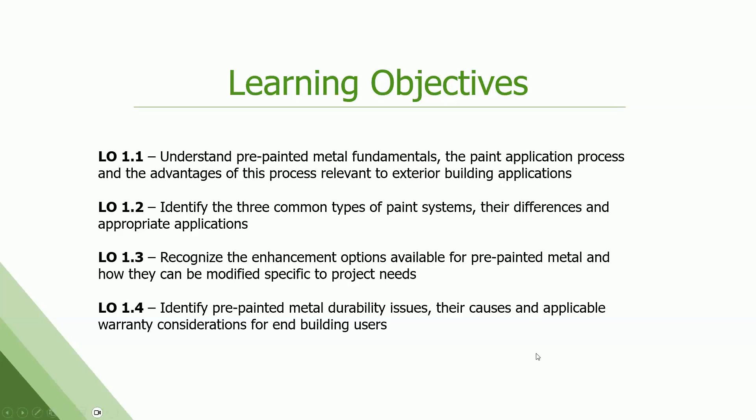So what is pre-painted metal? It's very self-explanatory. This is metal, usually coated steel or aluminum, which gets its paint applied in a factory setting before it gets fabricated into an end part for the construction industry. So these coatings have to withstand that forming, shaping, and installation process. There's a lot of science that goes into that, but they're not all the same.

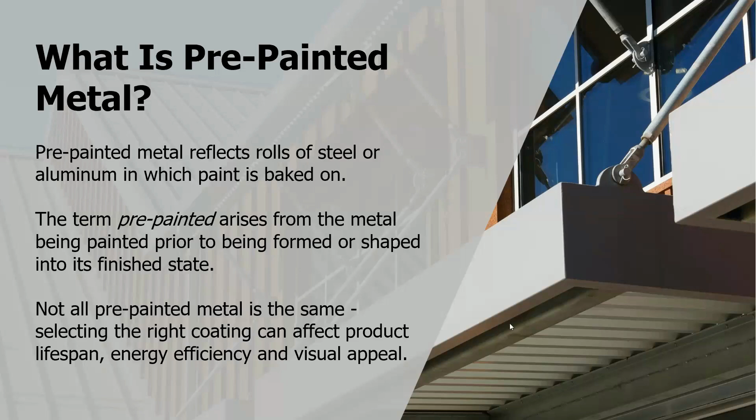So we're going to talk a little bit about how this factory applied coating works and a little bit about the substrate before we dive deeper into the paint coating itself.

Pre-painted metal or coil-coated metal goes into a lot of applications, mostly exterior, but does get used interior as well. Exterior building products tend to be metal roofing and siding, gutters, rainwater goods, insulated metal panels, composite panels, roof tiles, and trim and flashing accessories.

But we also do factory applied painted steel and aluminum for HVAC. Most of your appliances, kitchen type appliances, are coil coated as well before they're manufactured. Cabinetry, hot water heaters, door trims, ceiling trims, the T-bar that holds your acoustical ceiling in place—that's all coil coated or pre-painted metal.

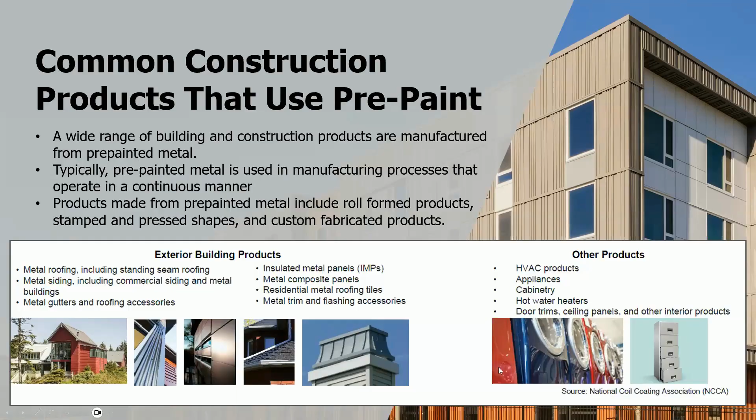Pre-painted metal fundamentals and how it is applied. Paint can be applied in 4 primary ways: air brush applied, dipping, rolling, or straight brushing. We use a rolling technique, but not like rolling house paint on, a little bit bigger than that.

This is a typical generic coil line or paint line. They tend to be very, very long. Our lines, for instance, can hold up to 2,500 linear feet of metal from end to end, so they're big, typically 3 to 8 stories tall.

We load the metal coil at one end. It's a continuous process, runs through the line, it gets cleaned, gets some pre-treatment, gets a primer, gets a top coat. Those are baked on at very high temperatures. These lines run anywhere from 100 to 700 feet per minute. From the time the paint is applied till fully cured and you're able to wrap that coil back up, it can be as little as 15 to 30 seconds. So very fast, very dynamic.

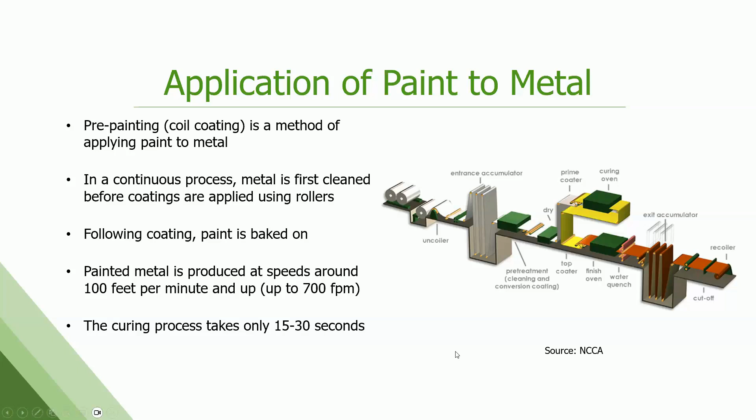This allows us to have a very good, consistent product as well. It's highly controlled. Everything is cleaned the same way every time. Everything's very automated. We apply the paint in a very controlled way each and every time. So if you order a specific paint today, you order that same paint a month from now, it's going to look exactly the same. You can intermix those coils.

Very efficient, we're not applying very much paint at all. It's very, very thin. A typical paint system is 1.4 mils, so 0.0014 inches in thickness. That is thinner than a piece of paper. By comparison, most other industrial metal coatings, like for cars, powder coatings are 2 to 5 mils in thickness, so we're using a lot less paint.

There are solvent-based paints, but we are capturing those solvents as they go through the ovens and using that heat in a closed-loop system, so the final product is VOC-free. And again, this all happens before the fabrication, roll forming or stamping, whatever's going to happen to this metal. So this paint has to be very thin, it has to be hard, but also very flexible, and it's got to last on the outside of a building for 20 to 50 years without any change.

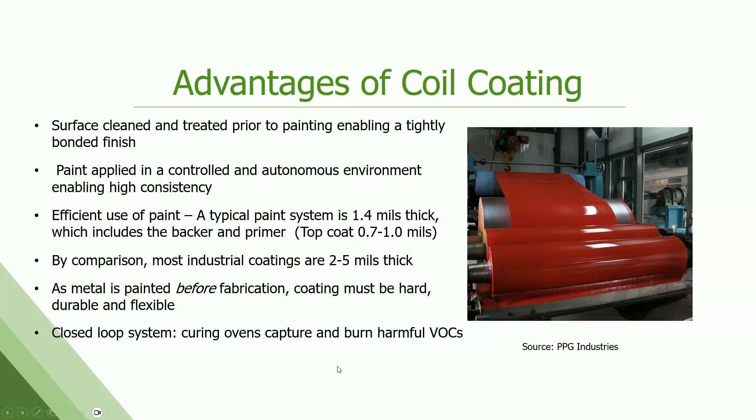But the size of how we do this and the fact that it's a continuous process does come with some limitations. Obviously there's a scale of economy here. It's very rapid once running. We can't start and stop very often, so we can't run very small jobs, or we don't like to anyways. So you've got to buy like a full coil.

We can do custom colors, but most coaters have a minimum order for custom colors or something special, typically whatever the line holds from end to end. So this can restrict the color palette a little bit, and can make it a bit more expensive or create much longer lead times if you need a short custom color run.

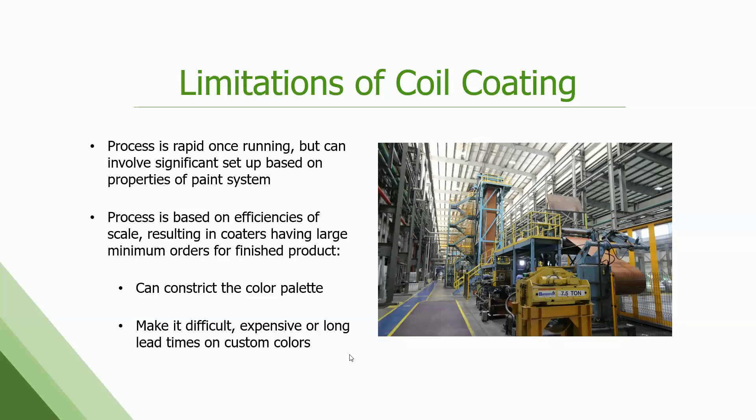So quality control, we do a lot of quality control. The paint companies do a lot of quality control in the paint before it even gets to us. And then once we apply it, cure it, bake it on, we do a lot more testing. The really important things are we've got to simulate that forming and fabrication process it's going to go through. So we bend it, we bump it, we deform it. We check to make sure that paint is sticking and there's no loss of paint.

Color is hugely important in this architectural space in the world, consistently. So we are applying film between 0.7 and 1.0 mils consistently, tight color control within usually a delta E, which is a measurement of color, of 1 unit or less, which is not anything the human eye can pick up on. It's all, for the most part, computer controlled for color as well, numerically controlled. Gloss, kind of how shiny that surface is, that's also tightly controlled and measured on every coil.

And of course, film thickness, very critical for long-term performance. If we're not at the right film thickness, it's not going to perform out on the building the way it should, and that impacts warranty. So we have several different methods for checking that film and making sure it's consistent across the width of the coil and from end to end in a coil and from coil to coil.

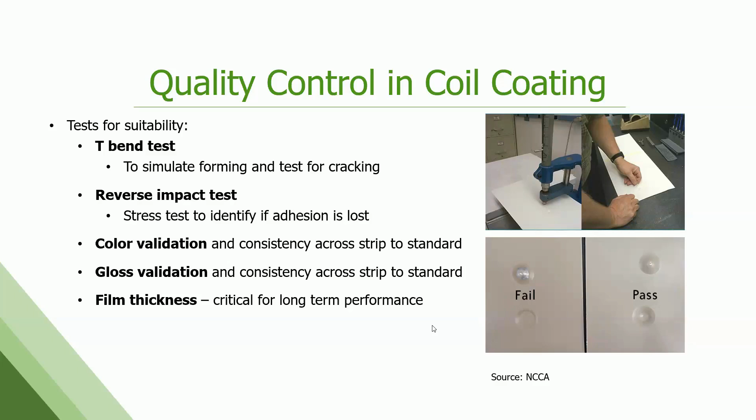But I want to talk a little bit before we get into paint about the substrate underneath, because it's very important as well, and there's whole other presentations that get in depth on it. But most coated steel is either galvanized, hot dip galvanized, or an aluminum zinc alloy, more commonly known as Galvalume or Zincalume, which are trade names for a 55% aluminum, 45% zinc product.

Hot dip galvanized is 100% zinc. It's been around a lot longer, but both are used for exterior buildings. The Galvalume product does come with a corrosion warranty. That aluminum component gives it much better corrosion protection long term. So you can get a corrosion warranty on that product for most applications, not all.

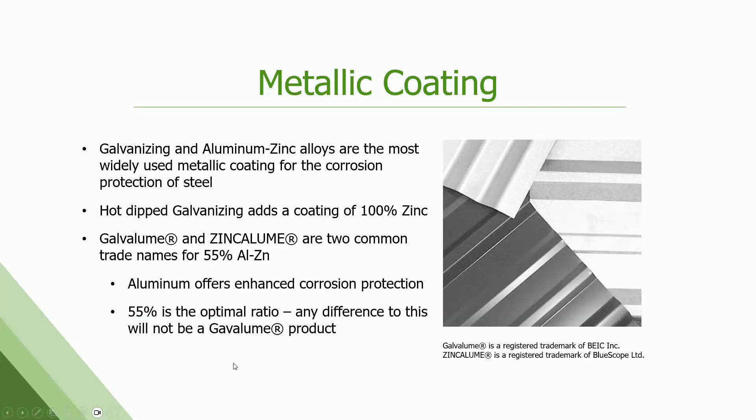If you're buying 55% aluminum zinc product, you probably want to make sure you go with someone who's BIEC licensed. That is a licensed technology. You can't use the Galvalume name unless you have a license. I actually need to change this corrosion warranty number - 20 to 25 used to be typical. We're now seeing 40 to 60-year corrosion warranties on this product out in the field. So yeah, make sure they're licensed. You can go to the Galvalume website to see who the licensed producers are here in the United States and globally. It is a worldwide product.

There are environmental considerations that will influence which type of substrate and coated steel you buy. Marine locations, heavy industrial, acidic conditions. I'm not going to get into too many of those details today, but it is something to keep in mind.

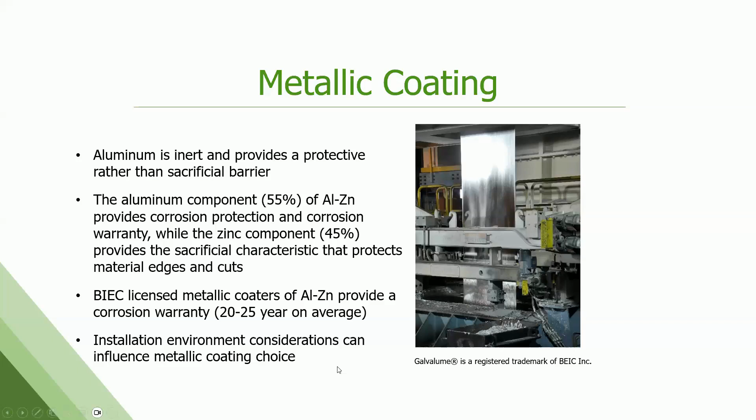So now we'll move on to paint. What is paint? We all know what paint is. We've all experienced paint in some form in our lives, whether it was finger painting as a child at school or painting our house or a car, or whatever that might be. It's a liquid, dries to a solid film.

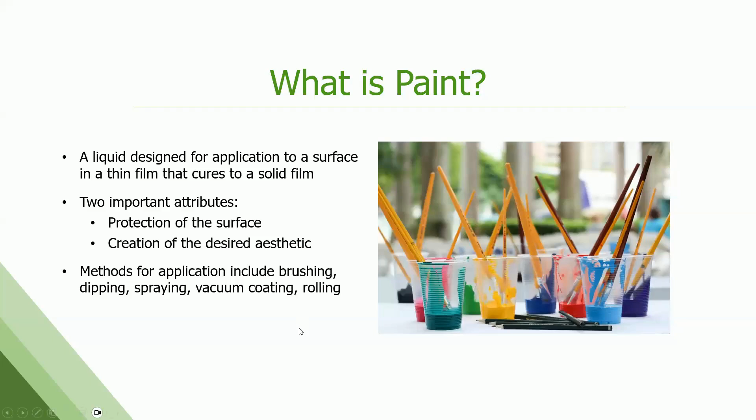Usually it's trying to do two things. It's going to protect the surface of whatever it's going on, and we want it to have a certain aesthetic and appearance. It can be brushed, dipped, sprayed, vacuum coated, rolling - there's a whole lot of ways to do this. In our world, for coil coating and for exterior roofing and wall, which is what we're focused on here today, the primary components are resins, pigments, solvents, and additives.

The resin, also called the polymer, or the binder of the paint, really dictates the physical and chemical properties of that paint system. It's kind of carrying the bulk of the load on its shoulders. We then have pigments, obviously very important for color and aesthetics, but also important for some protection and weatherability as well, which we'll talk about later.

Solvents - like I said, these are all solvent-based paints. They've got to be in a liquid consistency at a viscosity that we can pump it out of a drum onto a coater head on a paint line and apply it. You don't want it to be too thick, you don't want it to be too thin. And then there's additives, which just fine-tune the overall characteristics.

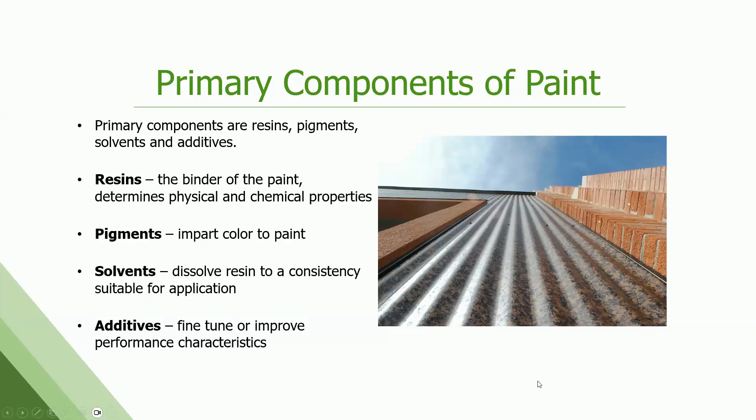So this is kind of a cheat sheet on the components of the paint and what they're bringing to the overall recipe or equation here. So the resin, the polymer: durability, hardness, flexibility, adhesion, gloss, chemical resistance, corrosion resistance, humidity resistance, impact resistance. That's a lot, it's a long list. Pigment, again, primarily aesthetics, but also hiding the substrate. Some corrosion resistance comes from the pigmentation in the primer as well. The strength of the film, some water resistance, of course, UV durability as well.

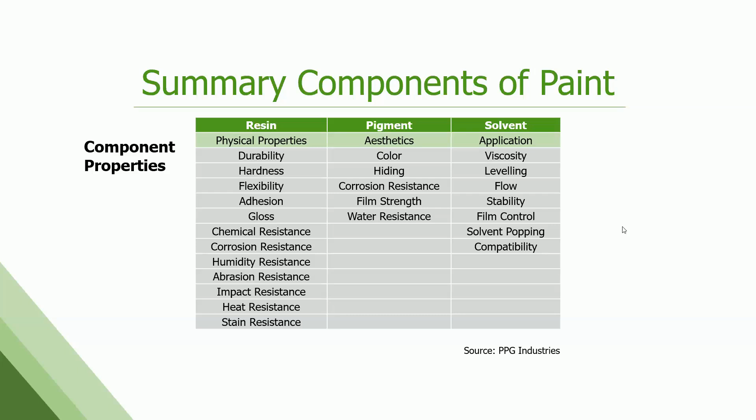And then the solvents, really not applicable to the end user, more important to the coater, but it's got to flow good, flow right, allows us to control the film. It's got to be stable, right? We want drums of paint that are going to last more than a couple months because we might run only part of a drum, put it back in stock, pull it out again later. So it's got to have the right solvent blend so that all that stays in mixture the way it should.

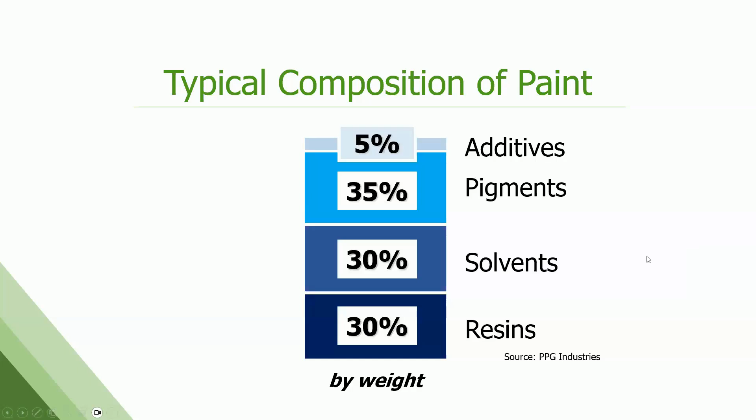So how do you pick the right paint? It's a million dollar question, right? You have to balance all of these properties with how it's going to be used at the end.

For roofing, roll-formed panels, it's got to be somewhat flexible and a bit hard, but not too hard and brittle. This red line here is kind of where our typical exterior paints fall. They do lean a little bit to the harder side rather than too soft.

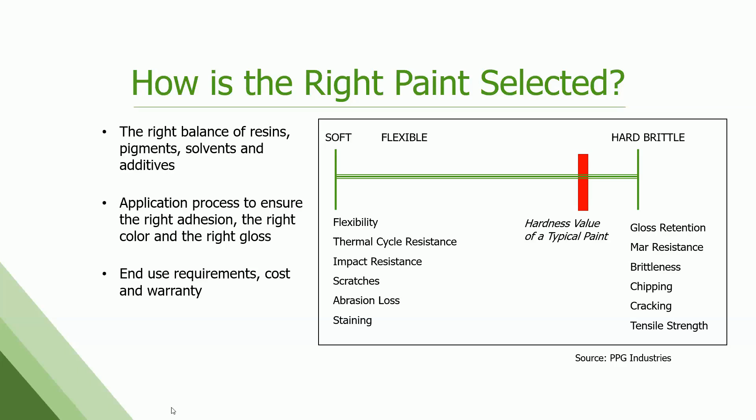So pigments—this is the fun part. This is how great it looks. These are insoluble particles, finely ground to a really small level and then dispersed within the resin or the polymer. That needs to happen evenly so you get a nice even color.

We use organic and inorganic pigments both. Inorganic pigments are metal oxides, usually things that are mined out of the ground. They're then fired at high temperature to make them very, very stable. They tend to be your earth tones—a little bit duller yellows, reds, greens, browns, and blacks.

Then you have your organic pigments. These are the bright primary colors—bright greens, bright reds, bright blues. They look great, but they're not very durable. We've probably all seen older red cars that have faded, or bright colors that have faded on signage somewhere in our world. They just don't hold up very well to UV light.

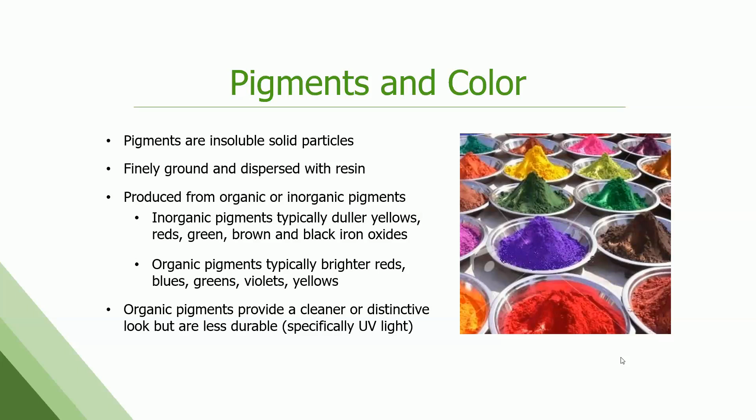So the paint companies spend a lot of time making sure these pigment ratios are good so we can achieve the color we want, but also perform long term because they're going to get a lot of constant sunlight. You may need a clear coat if you use a lot of organic pigment to help protect it more out in the field. And that's also factory applied.

Color—we talked about color. Very, very important, right? Consistency, how it looks to the eye, very important in the design world. So we do measure the LAB system, which is light, dark, yellow, blue, red, green, numerically for almost every color we run. We can't do it on the metallic micas, but we can do it on all the solid colors.

Most lines are running to a spec that's plus or minus 0.5 deviation on this LAB scale from the controlled standard, which is incredibly tight. The overall calculation is called delta E, of color change or color difference from a control to your sample. The human eye really doesn't start to pick up color change until you approach a delta E of 1, and we're controlling much lower than that from run to run.

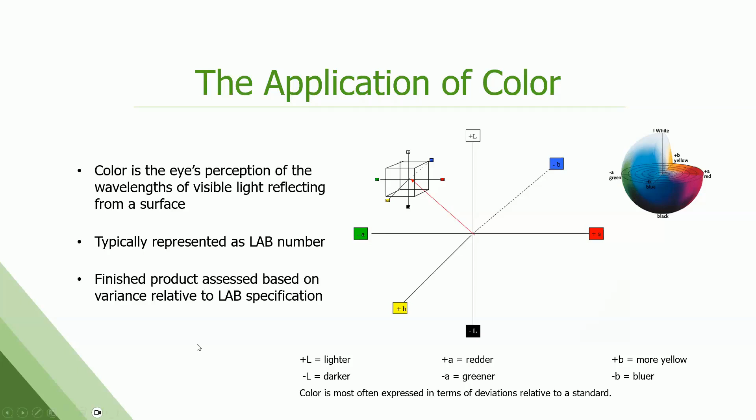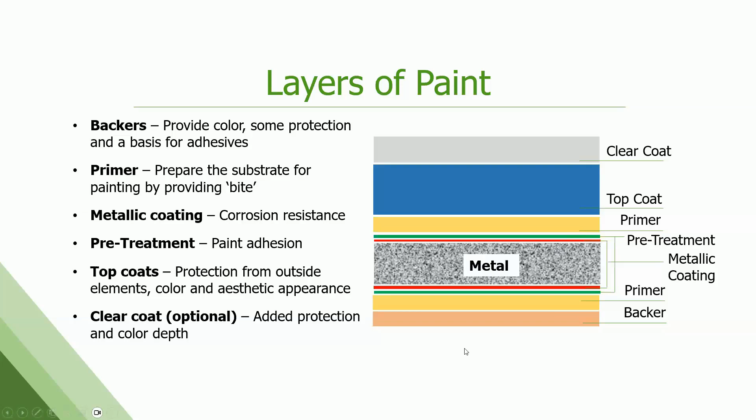Our first question: does the backer coat have the same life as the top coat? Typically, no. Standard or universal backers tend to be a lower end product and not applied at full film thickness. It will have a primer, but it tends to be done at a half coat, usually white, off-white, or light gray. It's probably more like a 10 to 20 year product, as opposed to a 40 or 50 year product on the top side. But if that backside is going to be exposed and you're concerned about its performance long term, have that conversation with your supply chain, because you can do a higher grade coating on that bottom side if needed.

How do you control batch to batch color consistency? Is color consistency better with an SMP or PVDF paint system? No difference on paint type as far as color consistency—it's done the same. I'll deflect a little bit: we rely heavily on the paint suppliers to do their job right. They've got very tight controls in their processing to make sure their batches come in the same to us every time, controlling to probably less than plus or minus 0.5 on the LAB scale. Most paint companies are using fully automated computerized dispense cells, so they can fine tune their pigmentation and final paint formula to us. For us as the coater, it's about repeatability of our process—duplicating roll settings and line speeds every time, hitting that film specification every time, and controlling that very tightly. We really don't see too many color issues off the line. It's quite consistent. I've been around a very long time, unfortunately—I'm on the older side now—but it's so much better than 25 years ago. We rarely have pull-offs because of color anymore.

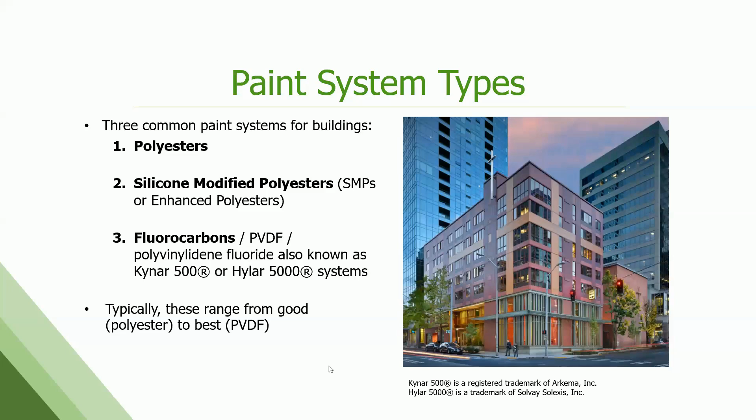Silicone modified polyesters are polyesters that have been enhanced. Fluorocarbon—I don't know why as an industry we have like six names for this product, but we do, I think because we like to confuse everyone. Fluorocarbons, PVDF, polyvinylidene fluoride, there's a little bit of chemistry for you—I won't ask you to repeat or spell it. It goes by the trade names Kynar 500 or Hylar 5000. You'll see in the architectural specs for monumental type projects, big buildings, big commercial jobs, government jobs, PVDF or Kynar/Hylar will be called out in the specs. The paint companies have to be licensed to claim their product is Kynar or Hylar—that's a licensed technology. These are listed in order here, typically from good to best, historically.

Polyesters, workhorse of the paint world. Huge amount of variation in formulation, huge amount of variation in warrantability and what it's going to do. I like to remind people the chemistry family of polyesters - a polyester denotes the type of chemical link that's occurring in the polymer. So we're doing polyester paints, and some of us are probably wearing polyester clothing, right? Very different products, same base chemistry.

A lot going on in the polyester world, but it's very cost effective. They have great flexibility, but can also have great hardness, so there's a wide range there that you can formulate to. Really wide range of color and gloss - you can get very high gloss out of polyesters, more so than you can in the PVDF.

Incredibly versatile. We see it mostly for lower end metal roofing. Polyesters are used extensively for rainwater goods, downspouts, light agricultural and commercial appliance wrappers. And then most of your interior products are going to be polyesters as well, because they don't need to have the exterior durability. But now I will also add a caveat here, that in the last 10 or 15 years, polyesters have come a really long way.

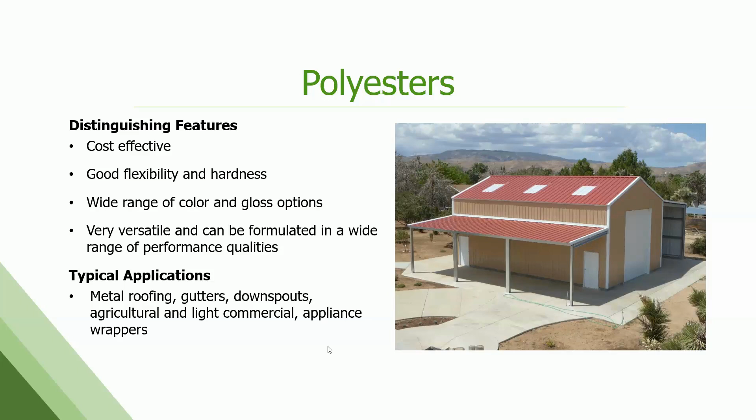You may hear terms like super polyesters, super durable polyesters. There's recent polyester technology that has really bumped up its performance in an exterior setting, really pushing the boundaries, and has gained a lot of ground on PVDF. So they're out there, they come with pretty good warranties, but you might hear those terms, super and durable polyester combined.

SMPs, again, silicone modified polyester. So if you react silicone into the backbone of a polyester polymer, it gives you better weatherability, better UV resistance, better resistance to chalk. You still get a wide range of colors and glosses. It is lower cost than the PVDF. We see SMPs used a lot for residential and light commercial, both roofs and sidewalls. Again, this technology over the last 20 years has really advanced as well.

If you're using really good inorganic pigmentation, both in the super polyesters and the SMPs, they're going to have outstanding long-term performance in the field, much better than they did, say, 20 or 25 years ago.

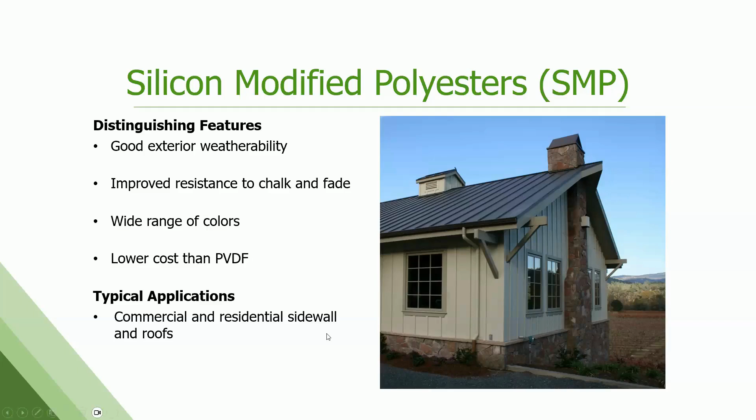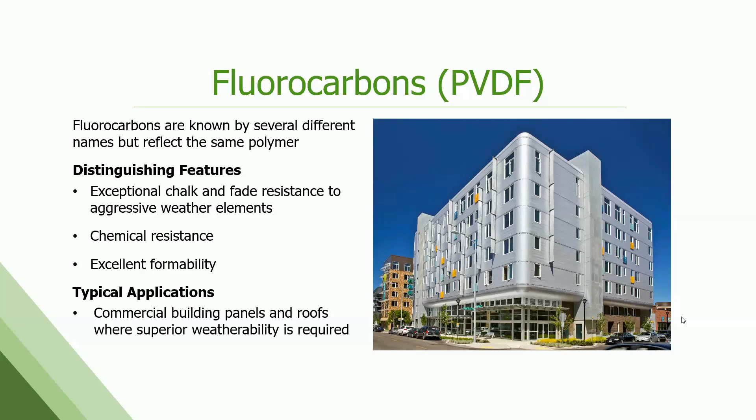So big commercial buildings, monumental stuff, stadiums, high rises, military jobs are going to call out fluorocarbon or PVDF. Also gets used a lot for high-end residential as well, so we do see it there. It's kind of the best of the best.

So again, a little cheat sheet for you guys, kind of a reminder of where these all sit. Again, polyesters are becoming tough because there's such a wide range - it's hard to just shove polyester into one bucket. But in general, good to better type system, very cost effective. Warranties can be anywhere from none to, I've seen some 25, 30-year warranties out there on polyesters. Durability, again, can range from limited to very good, very versatile. I do have the AAMA specifications listed here that govern each one of these.

SMP sitting in the middle - good workhorse, good for just about everything, wide range of colors, a little bit more cost effective than the next step up. And then PVDF is kind of the best. So high-end warranties, seeing warranties typically around 40 years for PVDF currently.

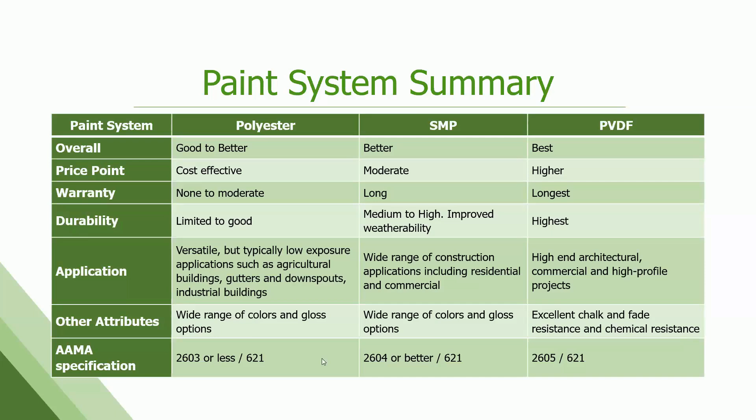So what do we want to consider when you're picking your paint, right? Because again, they're not all the same. And a polyester from one supplier may not be the same as a polyester from another supplier as well. So you've got to look at the technical data sheets, look at the warranty, to see what the performance is supposed to be like. So especially in polyesters, again, because of that wide range of formulations, they're not all the same.

The differential, however, from high-end polyesters or super polyesters to SMP are kind of marginal anymore. PVDF still offers the best UV resistance and optimal exterior durability. Reminder that Kynar 500 and Hylar 5000 are trade names for PVDF - you've got to be licensed, the paint companies have that license to call it that. And again, the PVDF system is the most durable when it makes up 70% of the overall resin.

So we talk about resins and polymers being the workhorse. In a PVDF system, 70% of that polymer will be the PVDF resin. The extra 30% will be an acrylic, which is used to keep it soluble and then help with cross-linking in the film of your paint.

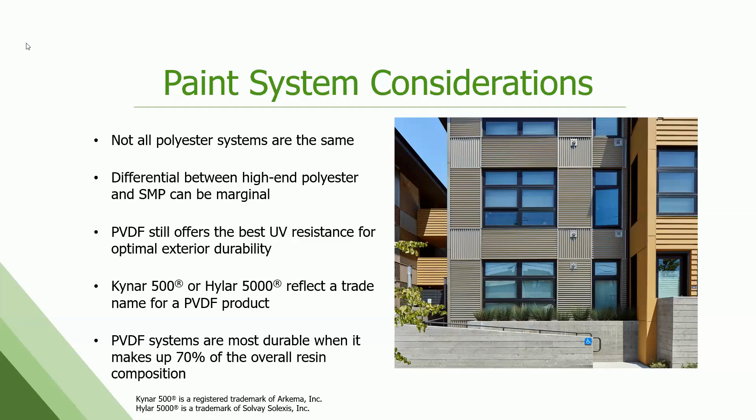Pause there. Questions? Okay, we've got some good questions coming in.

First question: why do we have a 40-year SMP but Kynar is 25-year? I can't answer that, I can only speak for my organization. Our Kynar warranty is longer than 25 years. It kind of depends on each panel manufacturer and what they want to take to market, so it's a bit subjective, and a bit of it is a marketing tool. But there are longer warranties on Kynar out there than 25 years.

Is the standard backer paint made from virgin material, or is it often made from recycled or secondary product? It can be both. I cannot speak to the percentage of virgin versus recycled, but both are available and both get done. The way our process works on coil coating lines, we typically end up with about 5 to 10 gallons of leftover paint from every run, and these are very expensive paints, ranging anywhere from $25 to $200 or $300 a gallon. So we don't want to throw any away if we don't have to. There are paint companies and coaters who do recycle their paint and blend it into backers or other products when they can. That does happen, but it's the same performance with a lot of tight controls around it. You can't just throw anything into that quote recycled paint — it's controlled like it's a new batch of virgin paint for performance purposes.

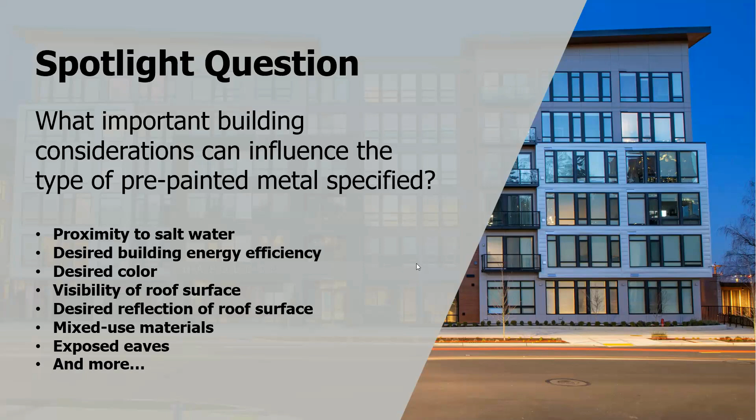A lot of the Southwest states and counties and cities have cool definitions in their building codes. The desired color — how visible is this building, where does it sit in its environment, how much light and glare is reflecting off of it? That's kind of important. What other materials are you going to use with the coated metal? You've got to make sure those are compatible and used correctly so that everything lasts as long as it should. Do you have exposed eaves, do you have sheltered areas, what does maintenance look like?

So we're going to hit some of the highlights. This is not the full list of possible enhancements, things we worry about, but it's the top ones.

The first one is special effects kind of pigmentation. Mica is not a metallic pigment, so we tend to refer to these as metallics because way back when it was actual aluminum or copper flakes used in the pigmentation of these systems. We now use mica or pearlescent pigmentation to get the same look. So these are your silvers, your champagnes, your copper pennies, those kind of colors done with this special pigmentation.

Clear coats can be used for a lot of different reasons. We talked about organic pigmentation earlier. If it's going to be susceptible to UV fade, you might put a clear coat over it to help it, like all cars have a clear coat over them to help that paint stay good. But you might use a clear coat for graffiti resistance, or because you're in a corrosive environment and you want some extra protection.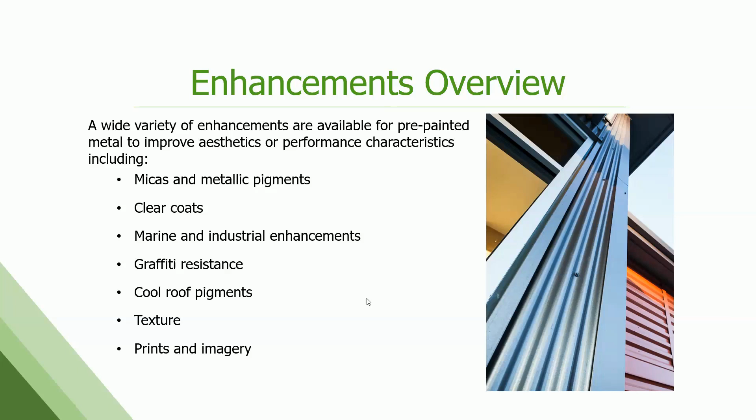So a lot of different uses of clear coats. Marine and industrial enhancements, we'll dive a little deeper into that - playing around with your primers, some of your top coat configurations to get better performance in severe corrosive environments. Graffiti resistance is available. Cool roof pigmentation, that's energy efficiency. Textures have become really big - textures and matte finishes, killing that shine or glare on pre-painted metal. We're seeing a real movement towards that, especially in the residential space. And then prints and imagery, very fun stuff we'll talk about. It's gaining a lot of ground.

So the micas and metallics - again, mica pigment is added to the paint like any other pigment. Gives it this kind of sparkle effect or this pearlescent color. We still call them metallics, even though they may not be metallics. Very light catching.

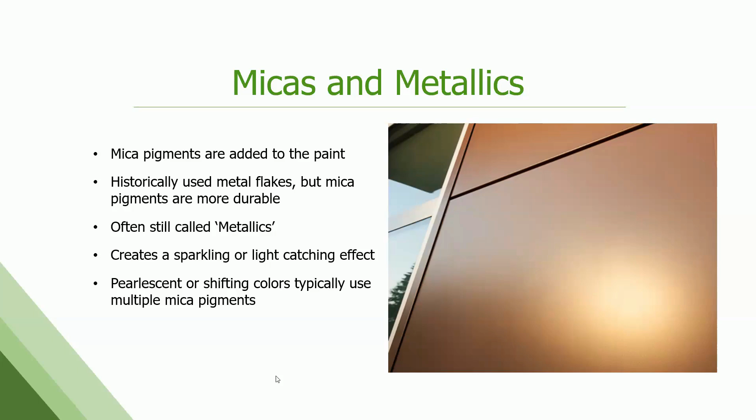You can also get color shift pigments. We see that more in the automotive world. You guys have probably all seen wraps or paint jobs on cars that might look purple from one direction, green from another. That pigmentation is available in the coil coating world as well. I haven't seen it used too often. The project I see most, because I'm here in Southern California, is the cruise ship terminal in San Diego, which has a color shift pigmentation on it, and that was all done on pre-painted factory applied metal.

Micas, some words of caution around micas and the metallics: these are not consistent from batch to batch. You need to run your entire project out of one run off of a coil coating line because these are very hard to control for color and look from batch to batch, from the paint making all the way to the application. So they are what we call batch sensitive. Cannot mix batches on these. There's no guarantee that they're going to look the same.

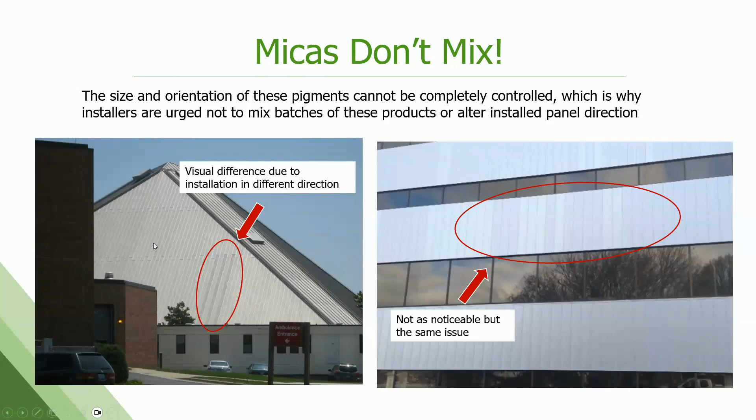Extreme environments is probably the one we deal with the most. We have a lot of coastline here in the United States, some of it pretty severe. So they can be modified - you can get warranted product right along the ocean if you use the right paint and right substrate. It typically includes high build primers, so we take those primers and either use special formulations and also apply them at a thicker amount to help beef up that protection. Also might need a clear coat as well. It's going to be 3 or 4 coat systems to get you a warranty where there's breaking surf.

The caveat here is that the definition of marine location is not consistent in the industry. So I try to tell everyone, if you're within a mile of the ocean for your project, have the conversation very early on about what type of paint system you need, because I see marine defined as everything from 1,000 feet from salt water to 1 mile from salt water.

So if you're within a mile, check with whoever you're going with for panels who's going to be supplying your project to make sure that the right paint has been specified and applied so that you can get a warranty, and then ask what that warranty is. It's typically not as long as regular product, right?

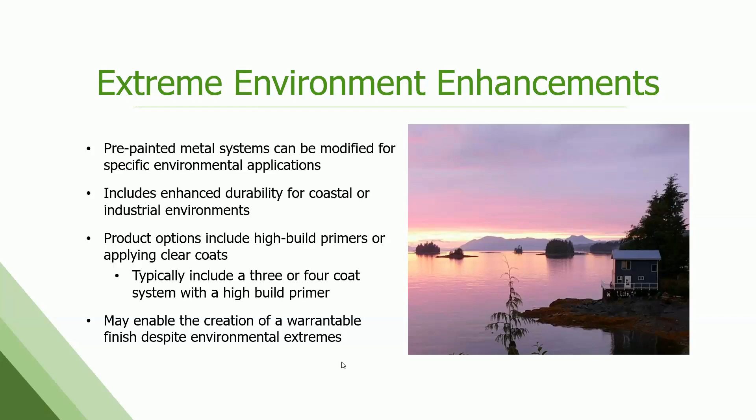PVDF, and this is going to be a PVDF system for marine application. Like I said, PVDF warranties now are anywhere from 30 to 40 years typically, but you could get typically 20 years with a high build system next to the ocean. It's pretty standard.

Again, clear coats, what we can do with clear coats. UV resistance is a big one, helping protect organic pigments when it's used for anti-graffiti purposes. It's a special clear that does two things: not only is it really hard to get other coatings to stick to it, so it's hard to get the graffiti or tagging to stick to it in the first place, but if it does stick, it cleans off very, very well, much better than a typical normal clear coat or paint system. You might also use clear coats to increase hardness or mar resistance, food staining or contact. There's kind of some niche markets for some clears out there.

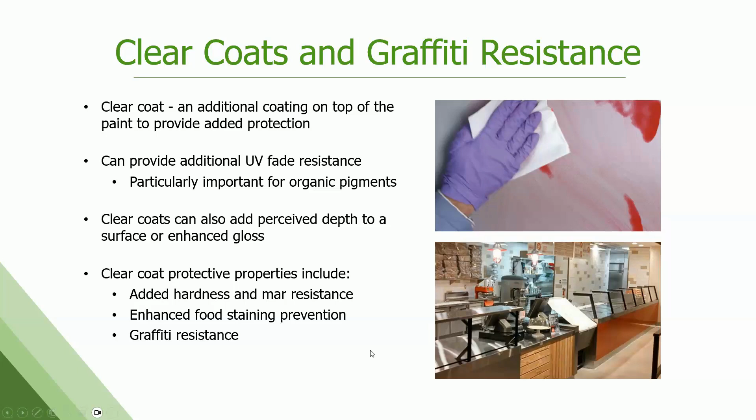Caveat on the clears - we call them clears, but they're not completely clear. They have a very slight yellow undertone to them. That's because they have translucent UV barriers built into them, which gives them a little bit of a yellow cast.

If you're using a light color, you need a clear coat, and that yellowing is a problem, then you can have a conversation with your supply chain about adjusting the color of the color coat to counteract that yellowness.

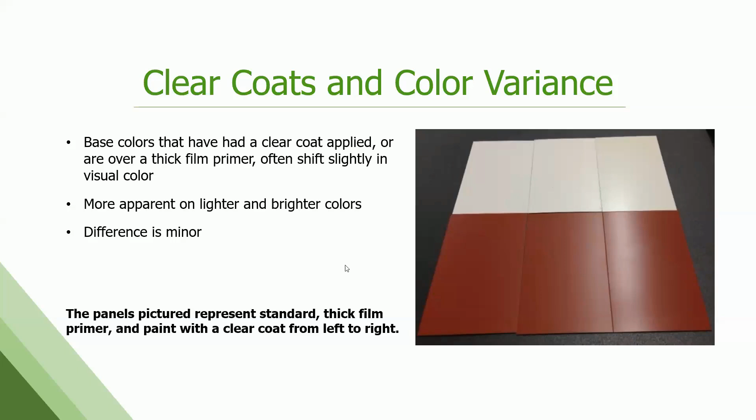Backers - we had a great question, several great questions about backers, kind of the unsung heroes. They often get overlooked, but they're necessary. They're often unseen, but not always. They are typically some kind of neutral color, an off-white or a light gray. But although we apply them typically at a half coat, we are still controlling them very tightly because we know that on an overhang, an eave, the inside of a pre-engineered building, you are going to see that backside. You do want it to look consistent, look the same from panel to panel. And again, we talked a lot about how we can do double-sided.

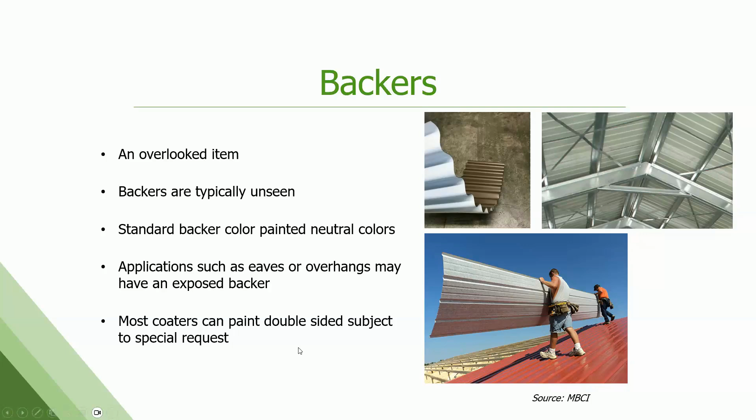Cool colors, right? So this was cool pigmentation introduced about 24 years ago now. These pigments were altered to reflect more IR energy, but look the same in the visual range. So we kept the visual color the same, but got it to reflect more heat and not get so hot in sunlight. This allowed us to get dark and mid-tone colors that were, quote, cooler than their traditional counterparts. Any paint system can use cool pigmentation - it's not limited to paint system. Most of the coil coating suppliers are using cool pigmentation as their normal default now. Doesn't usually have to be specially requested - it's kind of the norm anymore.

But it can greatly reduce heat buildup, so then you're not using as much AC, less energy. Helps with urban heat island effect as well. We all know how much hotter everything's getting - I saw an article today that 2024 will be the hottest year on record since we started tracking this stuff. So pretty important.

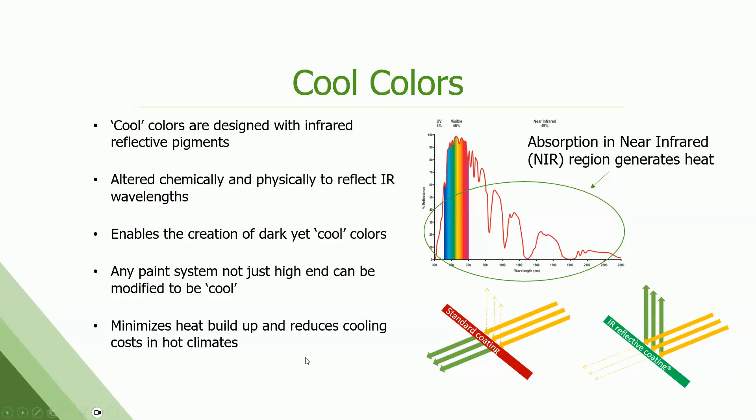There's a lot of terminology, though, around cool pigmentation that can be a bit confusing. So the standard terminology we use for cool pigments is solar reflectance - that's the amount of solar radiation reflected off of the surface. The emissivity is the amount of heat a surface dissipates away from itself. Those two values are used in a very long, nasty calculation to come up with the solar reflectance index, or SRI. This is what you'll see in LEED and in building codes. The higher the number, the better the thermal performance of this coating. So lighter colors still have an advantage, but you can get some mid-tone colors that are pretty darn good as well.

Most panel suppliers will have this listed on their color cards. This is an example here. The Cool Roof Rating Council is kind of the third-party independent entity that keeps us all honest on this, and you can certify your product and get it listed with them.

They also do aged performance, 3-year aged as well. Pre-painted metal does incredibly well. High-end paint systems pre-painted through the coil method will have little to no color fade until like year 20. So their thermal properties, their solar reflectance, is not going to go down like other materials might.

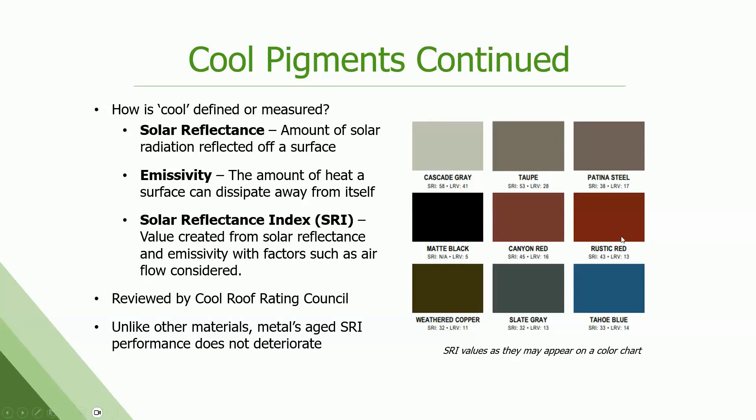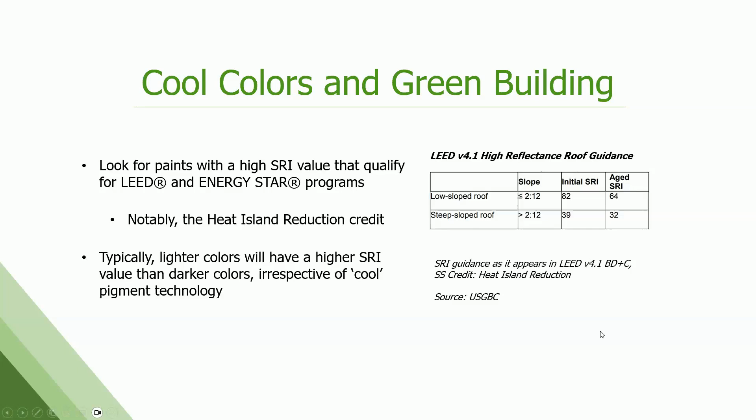Here's green building. A lot of you on the call are probably much more familiar with this than I am. This is the current version, I know we're about to have version 5 coming out. But they break it down: low slope, steep sloped roof, and what the initial SRI needs to be, and then what the aged SRI needs to be. Again, your panel suppliers should be able to give you this information.

Now this is where it gets a little confusing. Now we have gloss and sheen. Gloss and sheen are the visible shine off of the surface. Gloss is measured at a 60-degree viewing angle. Sheen is measured at an 85-degree angle. We have instrumentation that does this for us.

High gloss, high sheen results in a high glare from a surface. Low gloss surfaces will have a more matte appearance. Low gloss, low sheen systems will have a very flat, almost no reflection of light off of the surface at all. This is different than solar reflection. You can get cool pigmentation that has a very matte, low glare look to it. They're not tied to one another.

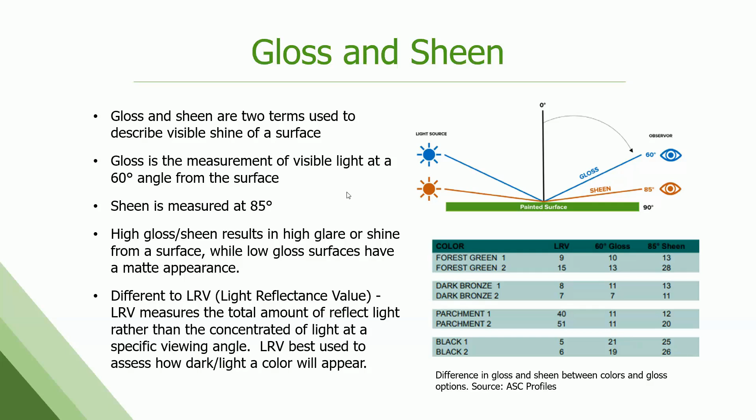This is also different than light reflectance value, which measures kind of the light-dark spectrum that a color is on. So they're all different, not necessarily connected. I have run across some building codes where they've gotten this confused, and they're equating low light reflectance with low solar reflectance values, or vice versa, and that's not true. So there's quite a few technical bulletins out there to try to keep this straight for everyone.

Again, you can lower the gloss a few ways. You can do it chemically, with how the polymer reacts. You can do it with pigmentation. You can do it by actually putting textured, granulated, physical particles in the paint to give it a rough textured finish, which doesn't allow light to reflect back off of it. So flattening agents, textured finishes, ultra matte finishes, again, becoming very, very popular because they look more like a natural substance rather than painted metal.

The panels here, this gray color in the top photo, those are numerically the exact same color. One has no gloss or sheen, or less than 5 gloss and sheen, and the other one has a standard kind of 20 gloss on it. And that's visually how different they look, even though they're the same color. Same with the blacks. You can see here the LRV is the same, vastly different gloss, vastly different sheen, almost identical SRI properties, right? So very different look, same cool properties, very different finishes.

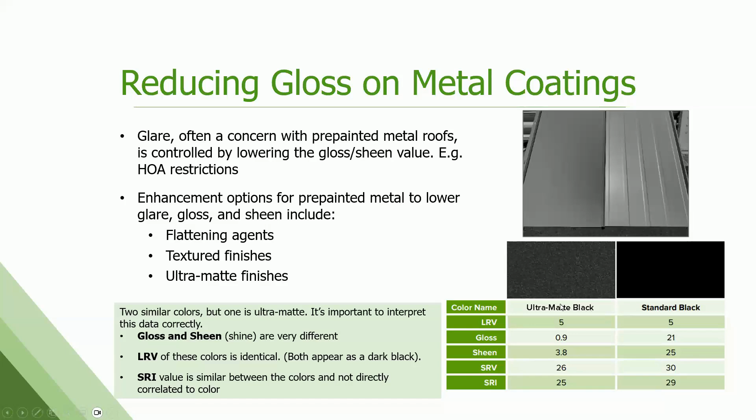And then the fun part, this is where it gets, I wish we could spend more time on this. Prints and decorative coatings. You don't have to have a solid color. A lot of lines can do print and digital printing now. These are rolls that have been etched or carved to give that print pattern. You can do different color combinations. It may have one print pattern, it may have two. It can look like wood grain. It can look like patina. It can look brushed. There's a lot of different effects you can do.

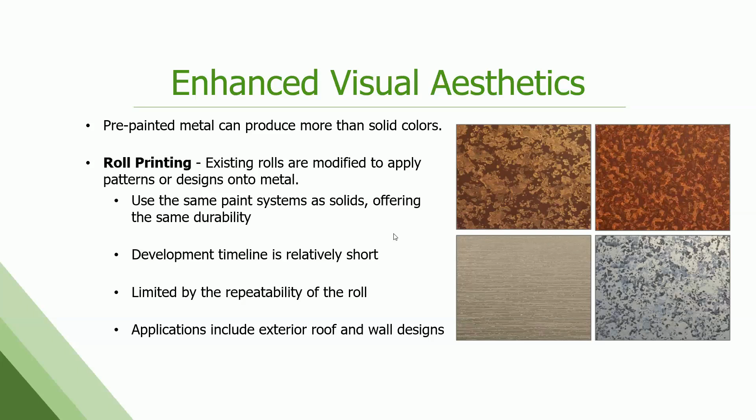Development time is relatively short. You do have some limitations because there's going to be a repeat on the pattern based on the size of the applicator roll that we're using in production. But yeah, really popular, it's a neat look. And now we're getting into digital printing as well, which is the picture here. So you can actually print imagery with not much of a repeat. I think they can go up to 30 feet before they repeat, and get some really cool looks as well.

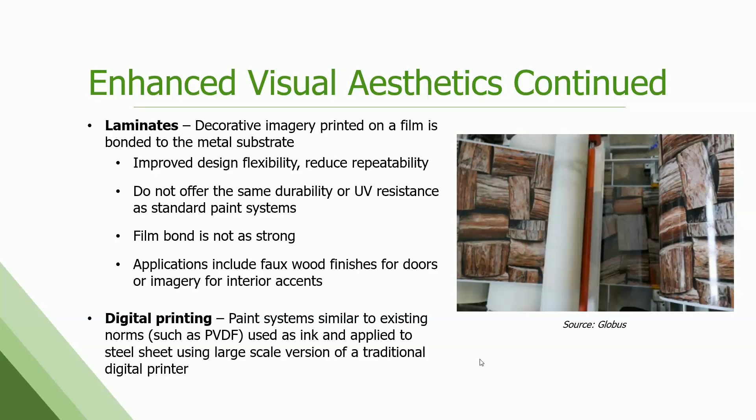There's also laminates. We don't see as many laminates in the US as we do overseas, but this is an image that's been printed on a film, and then that film is bonded to the substrate. Doesn't have great durability or UV resistance, and is used more for interior applications, doors, some garage door work. Don't really see the laminates being used for roofing and siding so much. That film bond is not as strong as actually factory applied paint directly to the surface.

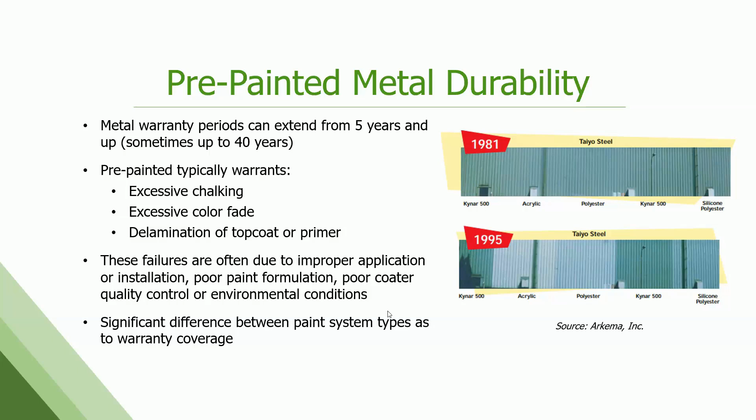This is a really old study. Technology's come a long way, but it just kind of shows you how a Kynar 500, a polyester and a silicone polyester, in 1981, same starting color, fast forward to 1995, you see how vastly different they perform against each other. So that's the color fade that we're talking about.

Excessive chalking, I don't actually see this very often anymore. Paint technology has gotten really good at minimizing this, but this is a degradation of the resin or polymer system itself, it kind of breaks down into little smaller bits and pieces.

Those little bits and pieces now can come out of that coating with some pigment on it, and we call it chalking because it looks like chalk. It's white, you run your hand on it, your hand's got this dusty white stuff on it, caused by UV rays. The higher end paint systems like PVDFs, high-end SMPs are not. I mean, it's rare for them to chalk. You just don't see it, but they are warranted for 20 years plus usually for that.

There is an ASTM method for measuring this. It's a little bit subjective. You take a black rag, wipe it on the surface, you compare it to some photos, 0 to 10 scale. The higher the number, the better on this. So 10 means there's no chalking, and 8 means there's very little chalking. That's kind of how the scale works. You want a higher number on this.

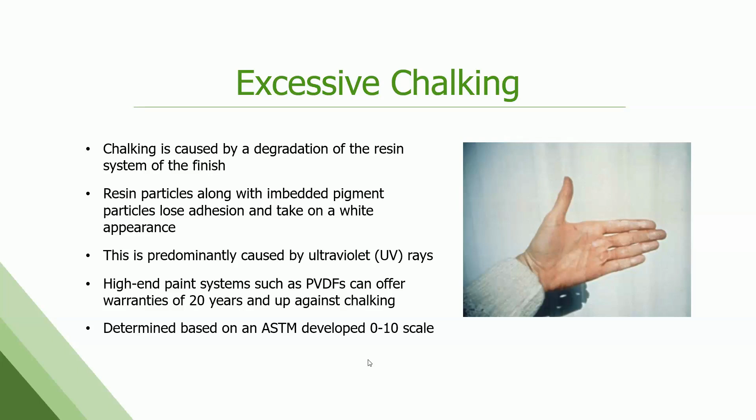Color fade, this is the big one that we see claims for. So again, the pigments are breaking down. We measure it by delta E. We've talked about that a lot. So that's a numerical value that represents total color change from its starting point. The human eye starts to see that between 0.5 and 1 delta E.

PVDF systems warrant the smallest color change. Inside a warranty, the headline might say 30-year warranty. Okay, great. But how much color fade are they allowing in that 30 years, right? So you got to look at that number that they've specified. Is it a delta E of 5? Is it a delta E of 7? Is it a delta E of 8? And again, the bigger number, the more color change that there could be.

I've got some samples here. They're not great on the screen, but starting at the top is where the color started, and then a 5-unit color change, and then a 7-unit color change as you move down.

What's more important out in the field on a roof is that it fades evenly. If your roof panels, siding panels are all kind of fading evenly 20, 30 years down the road, usually no one really notices or cares. But if you get a few panels that look different than the others, that's usually when we get a phone call to see what's going on.

This can be due to a couple of things. We call these candy cane striped roofs when we see them. A couple things can be going on here. It could be a difference in film. Maybe the coater didn't put enough film on some of these panels, so it's weathering different.

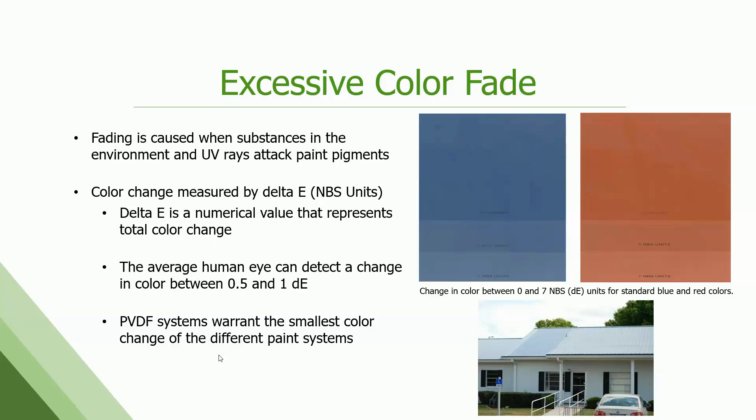It could have been that 2 different paint systems were mixed on a roof. I have seen that. I have seen an SMP and a PVDF, they're the exact same color, get mixed on installations, and they weather differently over time. It could be a mix of paint suppliers. Again, I talked about not everyone's paint's going to weather the same. They all have slightly different formulas, so you cannot mix paint vendors on a project, even though the starting color looks identical. So you might get differential performance over time.

Delamination. This is a tough one. Why is the paint coming off? And unfortunately, I've listed 5 possible root causes. There's actually about 400 root causes for this. It's a tough one to investigate. But this is a loss of paint, either top coat to primer or the entire paint system, including primer, coming off the metal underneath. Maybe bubbling, peeling, it might be chipping or cracking.

Low film is often a cause of this. You don't have enough film on there, so that UV is penetrating and breaking down those bonds. The paint comes off. Maybe the pre-treatment underneath wasn't good. Maybe the substrate wasn't cleaned well before you painted it. Maybe it wasn't cured right. This is fun. If you under-cure it, or if you over-cure it, you could have the same mode of failure in the field. That's a fun one.

Incompatibility between top coat and primer. But the one we probably see the most, which is a tough one for building owners or homeowners, is mechanical damage. So the panels got damaged during installation or during their life, a scratch, a tear in the paint for some reason. You now have an opening where moisture, ice, debris can get in there. It just kind of starts that picking off process that happens with paint. And once you've opened this paint system up to that, it can go pretty quick.

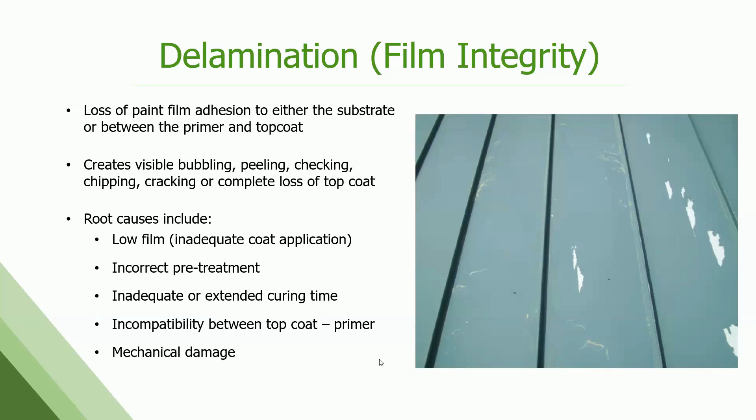Other avoidable failures we caution about include using other materials with pre-painted metal, so dissimilar metals where galvanic corrosion can be a problem. Not all metals are compatible with each other. Use the right sealants, and watch for metal filings from cutting or drilling on site that get left on the surface and embed in the paint. The panel itself isn't rusty, but those little debris pieces rust.

Wet stack is a storage issue. This is corrosion that can occur on panels while they're waiting to be installed, sitting in bundles somewhere. And then oil canning, not a failure, but worth bringing up. That's the buckling or wave you might see in some standing seam type roof applications.

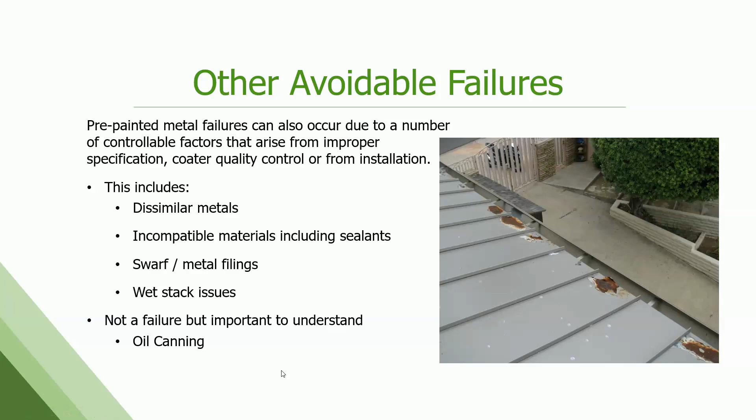Dissimilar metal is a big one, especially around marine settings. If you're in a corrosive environment near salt water, the biggest issue we see is stainless. Stainless is not compatible with hot dip galvanized or galvalume product next to the ocean. The galvalume or galvanized sacrifices itself for the stainless steel component, corroding underneath the paint. The first indication something's going on is your paint bubbling and lifting. This is a stainless steel lighting fixture recessed into a galvalume panel with no barrier between the two.

In direct contact, about 200 feet off the surf break outside of San Diego, this corrosion developed within a year or two of installation. It's quite fast. If you peel the paint back, you'll see corrosion down to base steel occurring underneath. The paint is coming off because there's nothing left for it to adhere to anymore.

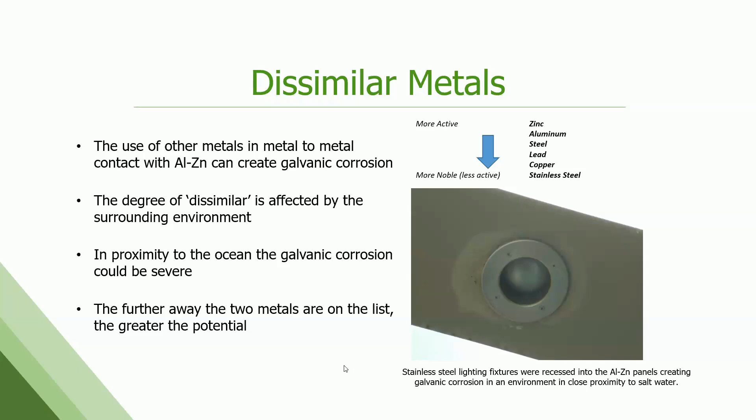Wet concrete - you've got to have a barrier. Wet concrete against the edges of this coated metal causes corrosion issues. Again, the paint starting to bubble off is your first indication.

Chemically treated wood can be a problem. They're usually treated with copper compounds, and copper and pre-painted metal don't get along very well. This is Pat Benatar's house on Maui - a copper-treated deck that was dripping onto the painted metal below, causing corrosion where that runoff was occurring. As soon as you got past the deck, the panels were fine.

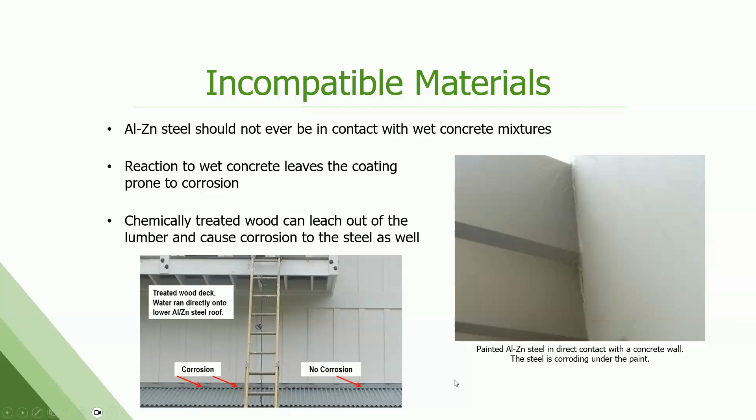Swarf is the big one. On new installations, we'll get a call within weeks of the installation being finished saying the roof is failing already, it's corroding. Probably not - but these are little debris from fasteners that were drilled in and not cleaned off afterward. Those pieces rust and leave a stain on the painted surface. It's an aesthetic issue, typically not a performance issue, but if you have a brand new beautiful roof covered in staining, you're not going to be very happy.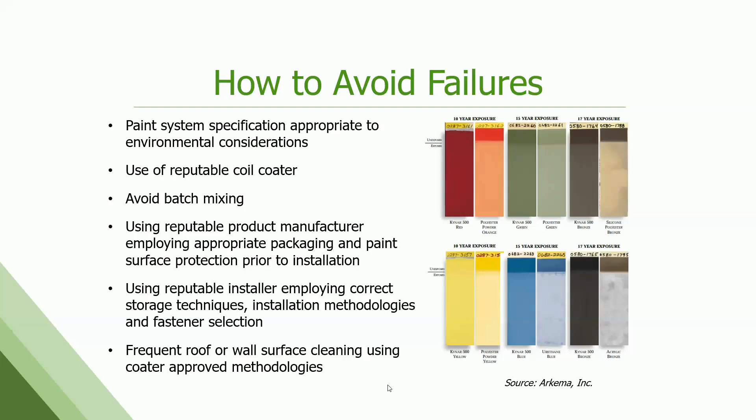You clean your car, you wash that paint system off. You kind of want to do the same for your roof, your walls. And with metal, it's really easy. You just need a good high pressure hose and you can rinse it down. Doesn't take a whole lot.

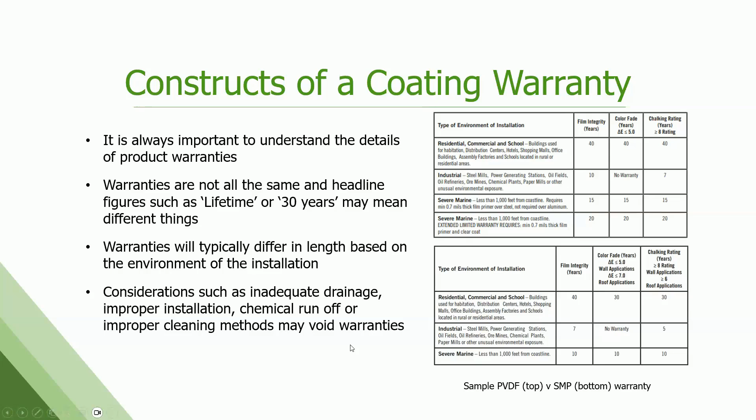Again, warranties - don't get caught by the headline. It says 40 year, it says 30 year. Read through the first few paragraphs at least to see what they're warranting for that time period - how much color fade, how much chalking, what are the limitations around marine settings and industrial. A little boring, but they're typically one pagers. Look and see what the exceptions and exclusions are. Just don't go by the headline duration.